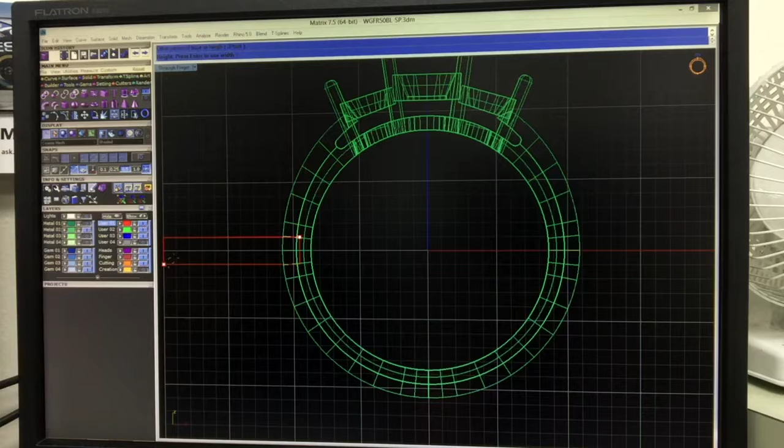So we'll go into the solid section and we're going to select a box. We'll go down into this through finger view and I'll actually expand that. Usually I'll make the box about 2 millimeters tall and I'll bring it all the way out, you notice, right to the edge of that grid. So I'll click there, and then I'll usually make it about 2 millimeters wide as well. So we'll click there as well. So there's our little box.

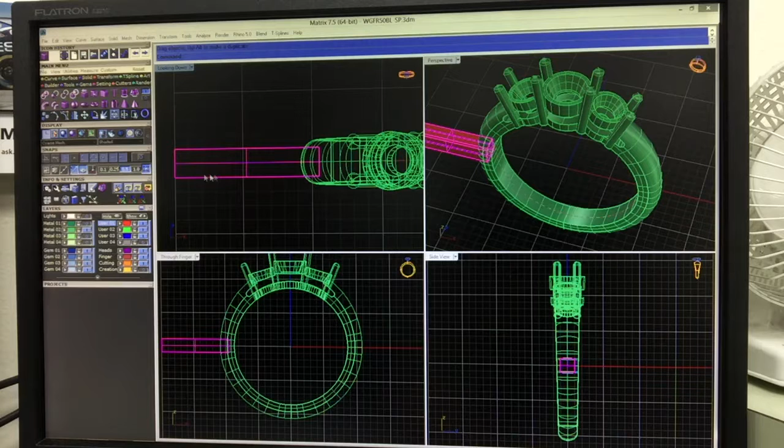But if you look, it's not centered with the ring, so we're going to just take that and just drag it down until it's centered. Since the grid snap is on, it's easy to do that. So if you look in this, it's centered this way, it's centered that way. So we'll take that, and then the next thing we'll do is we'll go into the Transforms tab and hit Polar Array. Now it's going to ask up here the center of polar array. We want it to be right there at the center, or you can hit F4 and that'll be the center.

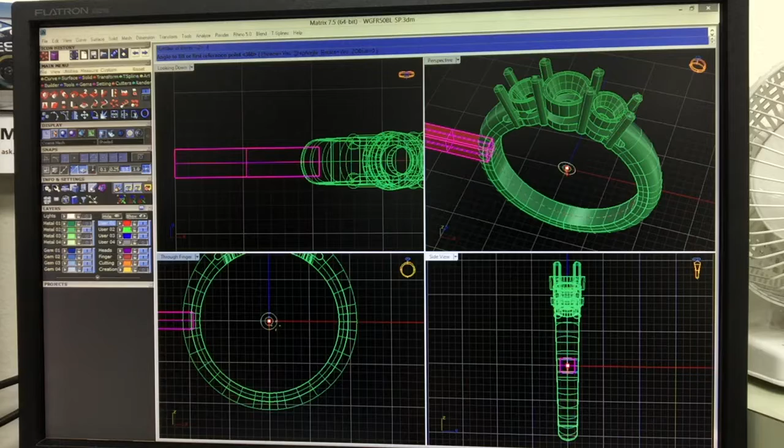Now it's asking you the number of items you want. We're going to want 4. Hit enter. And then it's going to ask for the angle to fill. The default is 360 and that's what we want. So we don't touch anything, we just hit enter. And then it's asking you if this is what you want, and it looks good, so you hit enter again. So we've got those 4.

Now if you look in here, this ring has a cutout area, but this support goes through that. So what we want to do on this one is we want to do a one-dimensional scale. We're going to grab it there and grab it there, and we just want to scale it up so that that section is not in that cutout area, because when it cuts, it's going to see that and it's going to cut that support as part of the ring. So we've got our 4 supports.

The first thing we want to do is grab all 4 of them, hold down Shift, and hit F2 or group. So now all of those are grouped as well as the ring is grouped. So now we want to go up into the Builders tab, which is the bottom one on the left. Click Builder, and since we're doing this for the B Mill, we're going to select this Toolpath Builder. This is for the B, this one's for the C. That one's got a little C on there, this is for the B. So we'll click that, and it's going to open up on the left-hand screen the builder.

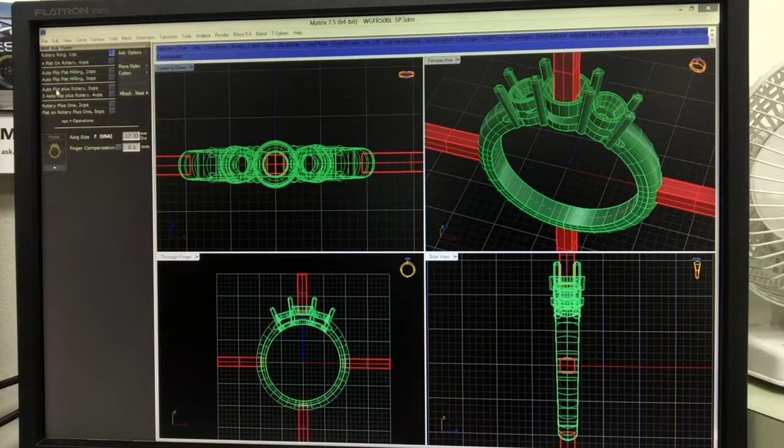So the first thing we want to do, since this is a ring and it's on a rotary, we're going to go down here until we find the one that says Auto Flip plus Rotary 3 operations. We're going to click on that, and then we're going to click the Advanced Options. Click on that as well. We're going to select our ring and we're going to put it in the model box right there. What that's going to do is automatically read the finger ring size as a 7. We want to make sure that that reads that.

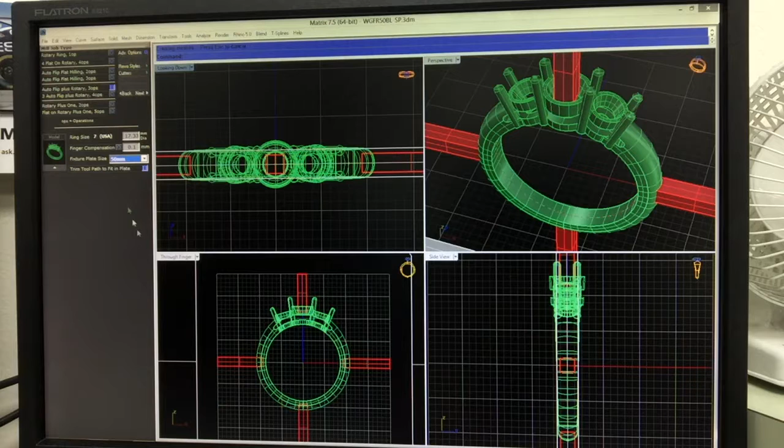And then we're going to need to select a fixture plate size. So we'll select the little arrow, and for the most case you're going to select the 50 millimeter plate. So we'll select that. You can see in this view it's got the plate selected. We'll go over here, hit next. Now on the core, usually I build the number of inner supports as 6. So I'll hit 6, and the center core size will depend on the thickness of the ring.

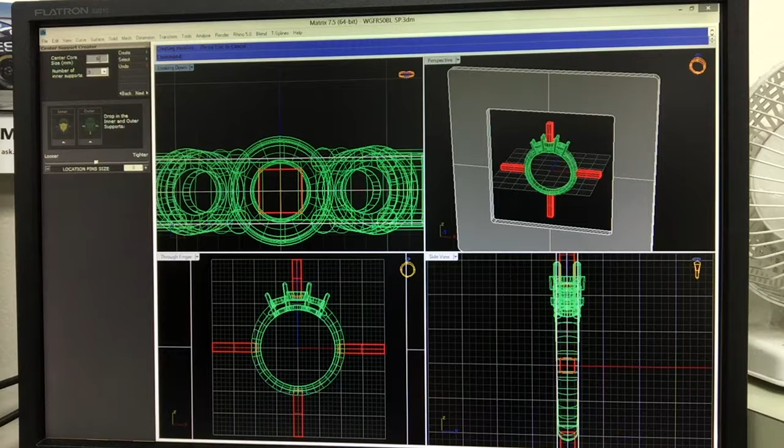Now this ring is a little bit wider than 5 millimeters, so on this one we're going to select probably 5 and hit create. Now if the ring is a little bit wider, I would use, and you can see here it actually defaulted back to 3, so we're going to go down here and hit 6 and hit create. So now it's got 6. You can see before, that's what 3 looks like. Sometimes you want to use 3 if you want, but I always use 6 just so that it has lots of support. While it's still selected and still purple, we're going to hit Enter. Okay.

And since these are all grouped, as we did earlier, we just select those and we'll set those into outer. So we'll put those into the outer and those are the inner. And again, this core size, depending on the width of the ring, you're going to want to adjust that a little bit. If the ring is a little wider, I would go maybe 6, 7, maybe all the way up to 8. I wouldn't go any more than 8 millimeters wide on the center core. But I've gone from 4 to 8.

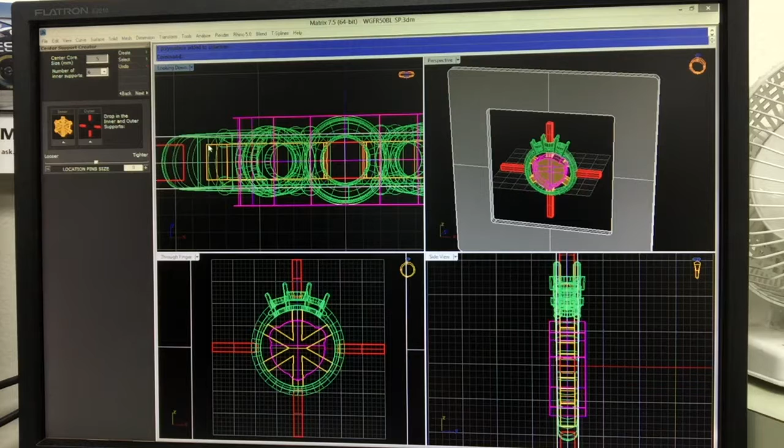And as I mentioned earlier, if the ring is extra wide and you need a little bit more support to hold it in place, you can grab these inner supports here, and if you hit Control C, that'll copy it, and then hit Control V, and that'll paste it in place. So then you can see there's 2 of them there now. You can take one of them and just kind of drag it out a little bit, and then hit Control V again, you paste another one and drag it the other way.

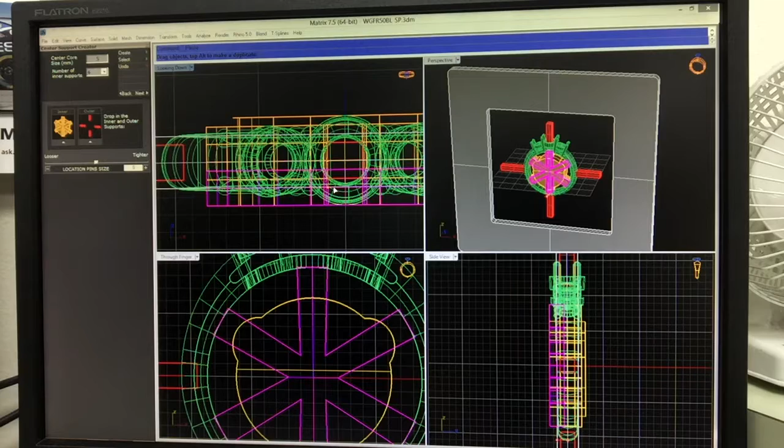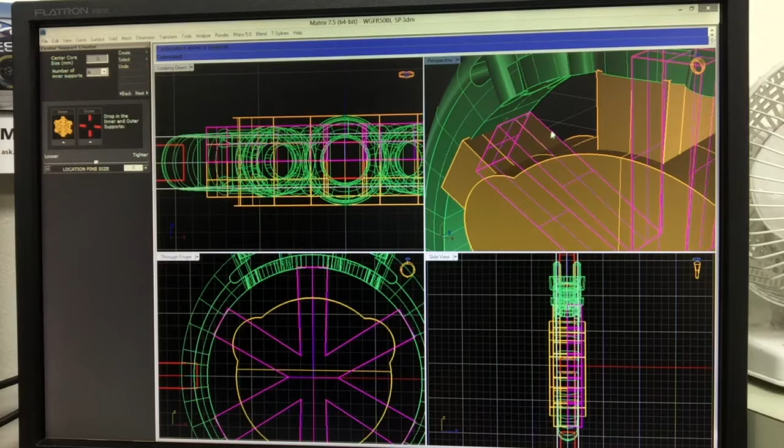So if you need a little bit more extra support, you can see how it gives it a little bit wider. In this case we won't do it, but sometimes you will, and then again you want to grab all of those and select and put it into the inner core. On this one we won't, so just hit those and delete it. But just remember, if you've got an extra wide ring that's 10 millimeters, 15 millimeters, you want to add a little bit extra support. Otherwise portions of your ring might break off because it doesn't have as much inner support. So we've got all that selected.

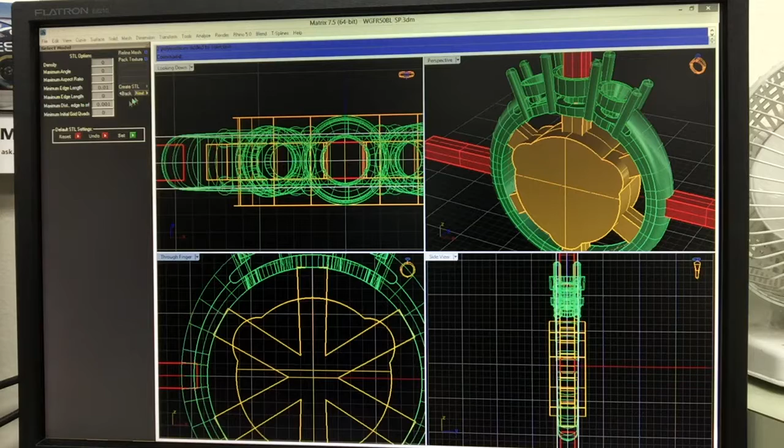We go to Next, and this opens up the STL options. You want to go down here where it says maximum distance edge to surface, and the default is 0.01. Just double click on there so that your cursor is blinking and make it 0.001. You hit Enter and then hit Create STL. And that doesn't take very long, according to how complex the model is. Let's go back here just to make sure. Okay, and I hit Create STL.

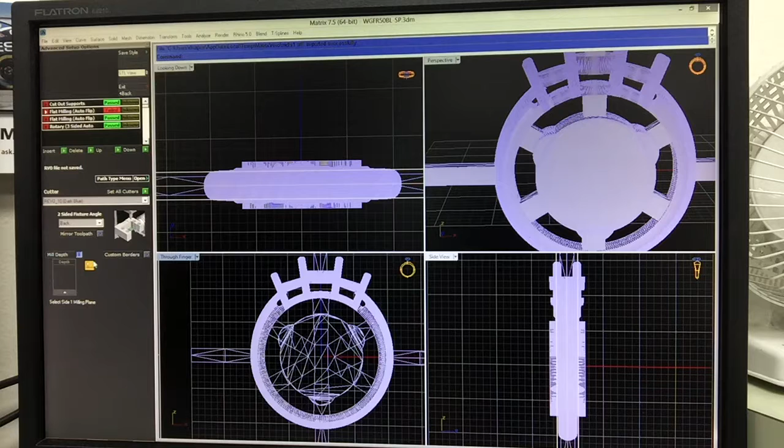Just want to make sure that you've got your plug, your inner supports, your ring and your outer supports all there. So then we hit Next. The first button is your cutout supports. That's automatic. You don't change anything. The second button is your flat milling options. The first thing you want to do is open up your mill depth. We'll zoom out here a little bit so you can see what's going on. Click on this yellow box here. That's going to set your toolpath depth.

You can see in this view, side 1, you just want to make sure that it's going past the center line of the ring. This one looks good, so while it's still selected, you're going to insert it into that box. Open up your custom borders and select the little yellow button next to the custom borders box. Click on that, and you build or draw a bounding box around your design, and you want it to be between 1.5 and 2 millimeters outside of your design. So zoom in here and look, there's 0.5 millimeter, 1.5. So somewhere along there.

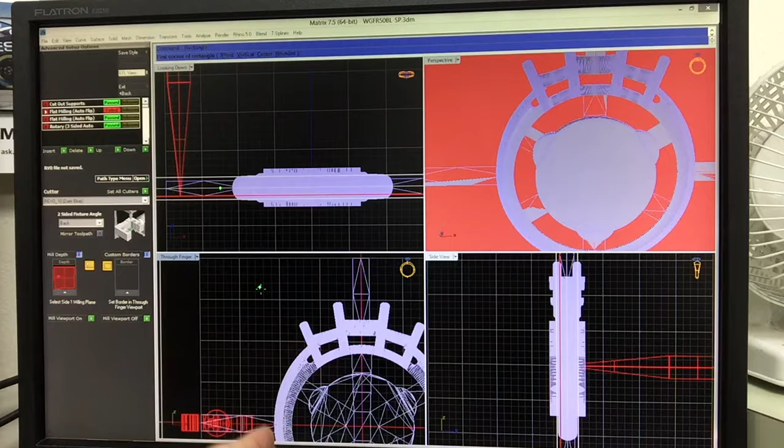So just drag that over until it's along the same lines as on the side here. Just eyeball it. 1.5 here, 1.5 there. Click, and then drag this, and you usually want to make it symmetrical. So the distance you got here, you want to keep that same distance there. And click. So you can see there's between 1.5 and 2 millimeters there, the same here, the same there, and the same there. So we take this and insert it into the border. And that's all set. You don't do anything with these two tabs there.

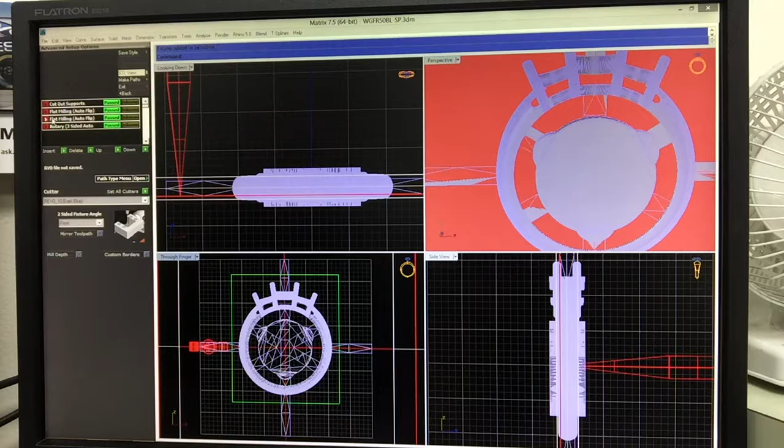Go up here and select the second flat milling options and do the same thing. Click on this yellow box. That's going to give you your cutter. Just make sure that it's cutting past the center line. Insert that into the depth box. The second one is the custom borders. We've already drawn this, so just select that and insert that into there.

So those are done. Go to the Rotary Three-Sided Auto. The only thing we'll change there is where the default is 0.05. We're going to change that to 0.03 on both of these boxes. Just double click and see where it's blinking.

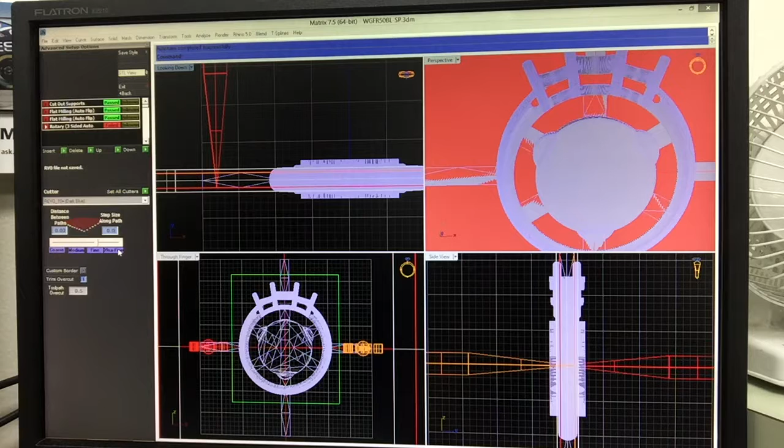Backspace 3, hit enter. Then go up to here where it says make paths. Click on that, and don't click on anything else, just wait for it to finish doing its toolpath generation.

On simpler models it goes pretty quick. On complex models it might take a little bit longer, but just let it do its thing, and it will get there.

While it's building it, you can move the mouse around, but don't click on anything, because if you click on anything it'll interrupt the toolpath generation, and it might either crash or give you an incomplete toolpath, and then you'll have to start all over. You can see over here it's giving you a percentage of how much time is left versus how much is completed.

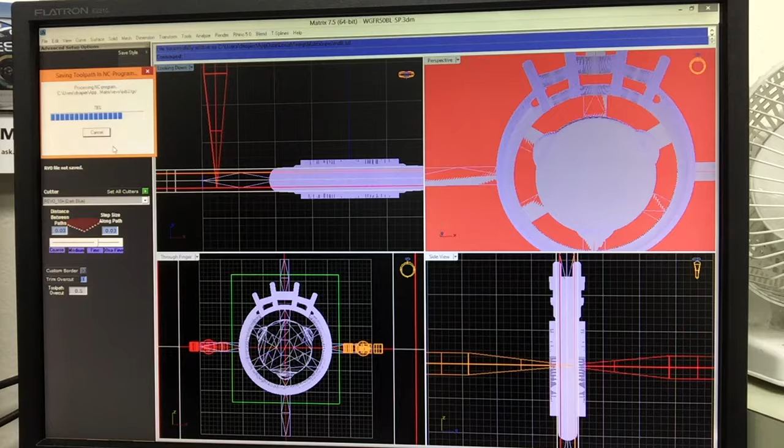Just kind of be patient with that, and it's just about finished. You'll know when it's finished when all 4 of these boxes are green. And there we go, you can see how it's red - that's your toolpath.

I mentioned before, we zoom in and you can actually see the toolpath. So we will go over here to where it says make RVO. Click on that green box there, click on desktop, and then you name your file. The name of this is a WG.

You can see it automatically fills, so we'll backspace until we get to there. It's a WG, it's a special order, size 7. You want to hit 2, side, flip, plus, rotary, and 10 millimeter. What that does is it gives you the style name.

This is a WGFR50BL-SP-7. The 7 is the size, this is a size 7. The next thing is a 2-sided flip plus rotary, that's the operation that it's going to be cutting. And the last thing is a 10 millimeter.

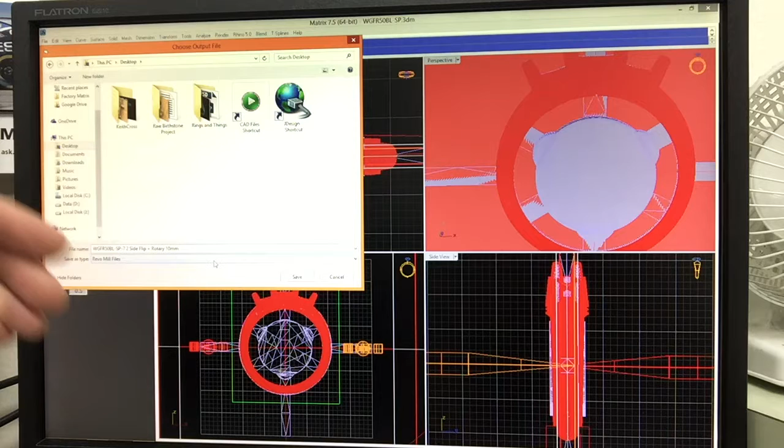Remember when we looked at the ring earlier, it was right at 5 millimeters wide. Since it's that close, we just want to make sure that it doesn't have an incomplete cut on the sides, so we'll use a 10 millimeter. So if the ring is between 0 and 4.5 millimeters wide, we use a 5 millimeter wax. Anything from 5 to 9.5 millimeters wide, we use a 10 millimeter wax. And anything from 10 to 14.5 millimeters wide, we use a 15 millimeter.

So you want to give yourself just a little bit of leeway. Make sure that's on the desktop, hit save. It doesn't take long to save at all. That's done. And if you want to, you can click on this little box right here.

That'll give you the estimated time. It gives you 2 times, the first one is for a Model A mill - that's not the one we have, we have a Model B mill. So if you look where it says Model B, it gives you an estimated 1 hour 49 minutes. That's about how long it's going to take to mill that out.

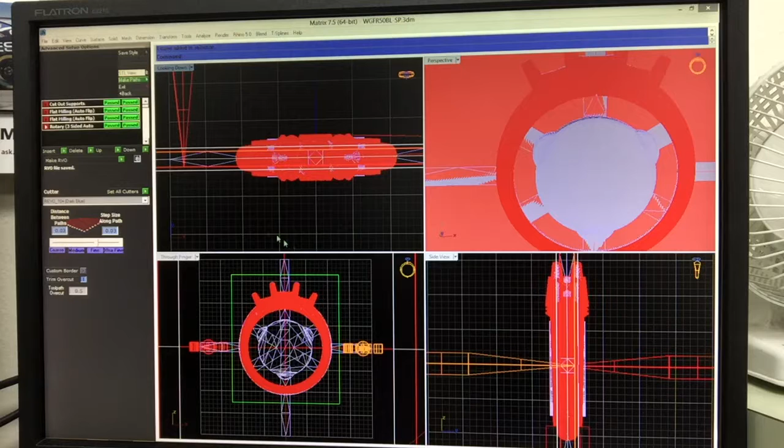So we're done here. The next thing we'll do is, you don't want to click there and close out, because that'll close out the whole program. You just want to go up here and click the little X. And there we go, and F9.

You want to save it, but you want to make sure that you're saving onto the correct file name, because sometimes that will default to where it just says Revo model. You don't want to do that. You want to make sure that this says the style of the piece that you're working on. So in this case it does, but on half the cases it won't, especially if you're doing a C mill, then it's going to automatically default to a Revo model.

But in this case it's the right model, so you just go up to hit save, and we're done.

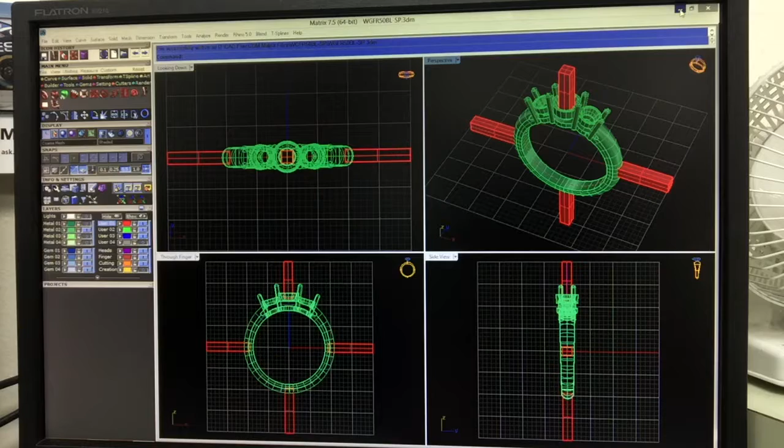When you go to your desktop, this is the folder or the file that we have. If you click in your flash drive, it'll open up a box. You just take this and you right click and drag it into the box, or into the flash drive folder, and hit move here. What that will do is it'll move from your desktop onto your flash drive.

And then you do the same thing when you get to the mill. You move it from the flash drive onto the desktop of the mill by right clicking, not left clicking, because if you left click it's going to duplicate it, but if you right click it'll actually move it and delete it off your desktop. So that is the B mill demonstration.